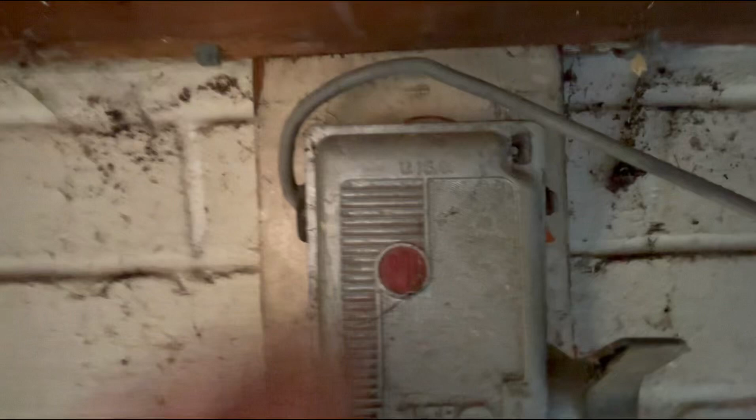Consumer unit then, at the moment they've got this old rusty thing here. This is going to be going, because it's a mess, and that's going for a two-way garage unit, 16 amp for the socket, 6 amp for the lighting. So nice straightforward little install.

Basically what happened was the roof was rotten, so the builders had to rip all the roof off. Well not all, because this is still existing, but more than half I'd say. All the existing electrics have to be taken out for them to do that, and then we're reinstating, but a bit more minimal. They had about 20 sockets in here, all single, screwed to the joists.

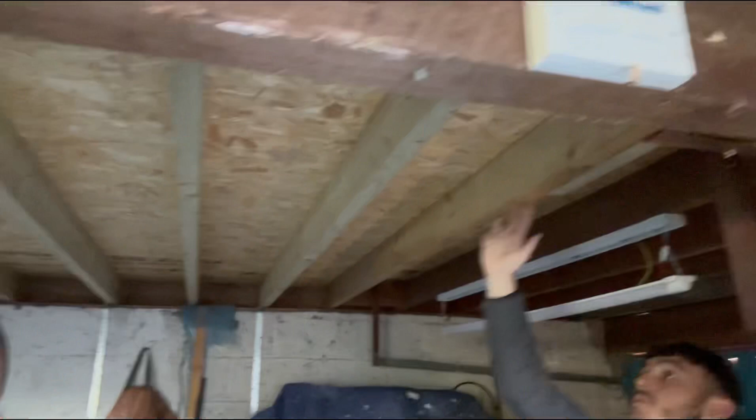They had a 4-gang switch, if I show you, up there, for an array of old fluorescent fittings. They were all over the shop, massive industrial things, 8-foot tubes in them. So yeah, we're just swapping it for these two LED battens, one switch, and a double socket. It will also be feeding the other side of this wall. There's an existing double socket because there's a washing machine in the little room the other side, so we've got to feed that off as well. So it'll be a 16 amp radial feeding the two sockets.

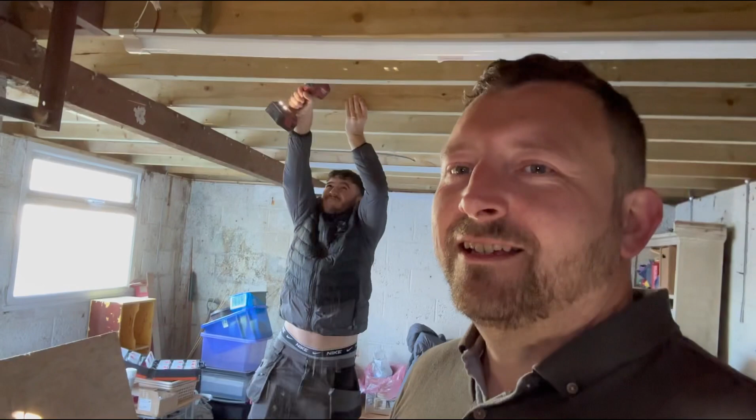So that's us today on Tuesday at the moment. Leighton's cracking on, as you can see. Oh, look at that! I can see his pubes. So yeah, we're gonna crack on with that, and I'll show you as we get on a little bit more.

Why don't penguins like rock music? Rock music? Yeah. No idea. Because they only like soul. You don't get it? Nah. Sole is a type of fish. Yeah. Yeah, it's crap, yeah. Standard penguin jokes. Read my one. Yeah, it's your joke. It's your joke. I know.

Oh. How does a penguin make pancakes? Oh, the big reveal. With his flippers. I'm sure these are getting worse. I know the penguins have been around for a long time, so they're probably running out of jokes, but come on, I'm sure they used to be funnier than this.

Light! Right, we've done it. Just want to explain a few things with this job. This is a job of necessity, so there's a few things that I'd like to change, but I can't. So basically, it's an old dear who lives on her own. This garage is fed off a 2.5 twin and earth. It's in metal tube, back to the house. It's fed off a 16 amp 3036 fuse, no RCD protection.

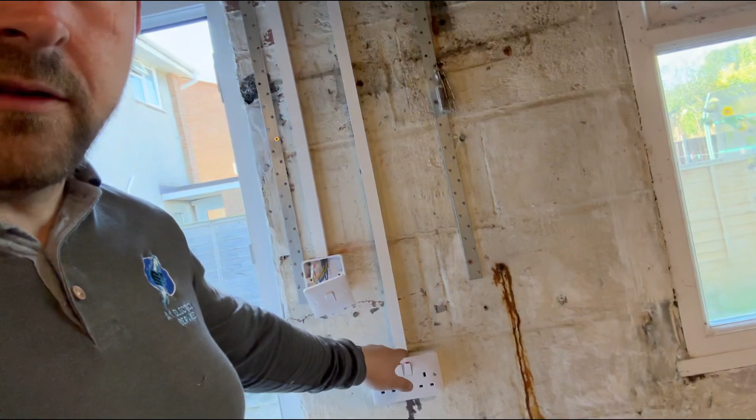We're also fitting Hager accessories. To be honest, I'm quite impressed with the Hager sockets. Nice sockets. The patresses are crap. You're never going to get two cables in one entry hole in the top of there. Don't know why they don't make them bigger. Switches are pretty good as well, and you also got the neutral loop, which I do like. Saves you on a Wago. Have to Wago the earths, because the patresses don't have an earth terminal. I hate it when the patresses don't have earth terminals.

But yeah, that's that. So we're all up and running. Leighton's going to go around testing now while I'm just going to talk crap on the camera. And yeah, that's job one done. To be honest, we absolutely smashed that. Hour and 20 minutes we've done that in. Don't get me wrong, it's not the neatest of jobs. The clipping isn't the best, but it's a garage. It's done, safe. It's going to be tested, RCD protected now, which it wasn't before. You can have a bit more light now off these LED battens as well. These are the Ansell ones, the Tornadoes.

And that's that. So next up on the agenda, I got to pop to a job now, meet the client, full renovation of a house, possible rewire. So I'm going to go there, give her a quick quote. And then we're going to the barn job. So I shall see you at the barn.

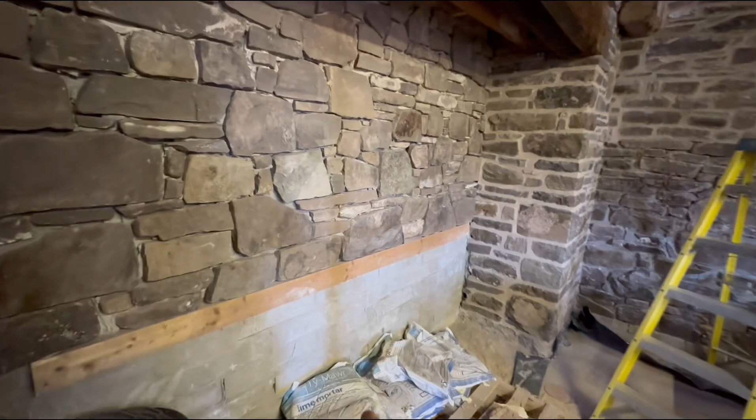So we're at the barn job. This is going to be the extractor fan here. Cooker's going in here, so we've got to get cabling in for that. We've got to try and get all the ceilings done basically. So there's going to be lights in all of these windows. 3 there. 3 here. Don't know how we're going to do it. We've got to get cabling down. There are lights as well. So we've got to get into here. Finished walls. This is the kitchen area. We're not worrying about the sockets at the moment because all that's going to have to come through the floor.

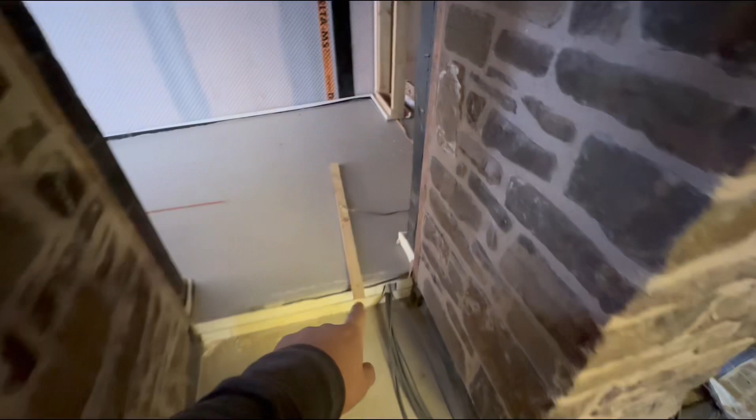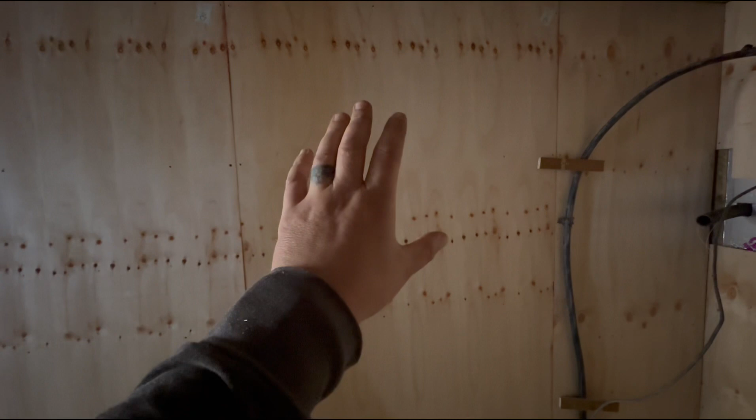We've got feeds through in a ducting through this screed because this is where the consumer unit is going to go. We've got a 25mm SWA coming down as the main incomer. We've got Cat 6 for the interweb. This is going to be the mains. These are various feeds, but the lighting is on a Rako system, I believe. Like a Lutron kind of system, so there's going to be a rack here with dimmer modules. Cat 6s to the keypads, which come back to here, and then all of our lighting is direct fed from here, off a 10 amp MCB off our board, and then it's all switched from here with wireless modules, which have 80-meter range apparently.

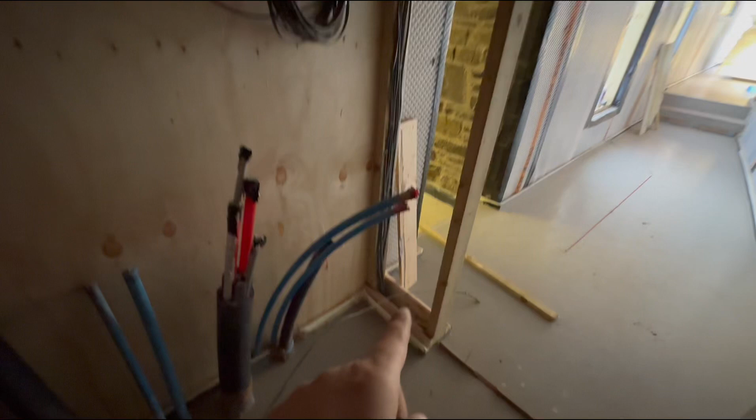This is the link building, we're not doing the link at the moment. All these walls are going to be battened off, ceilings are going to be battened off, and then we can first fix that. This at the minute is just cabling, ready to go back to the mains. So once the ceiling's all battened, we can get these back to the mains.

So we've got cooker feed, hob feed, sockets for the kitchen, sockets for the island. We've got a lighting feed in there, I've got a Cat 6 for data as well, just in case. Which is all going to run through this floor. This is all going to match this floor. So power, we're not too worried about at the moment.

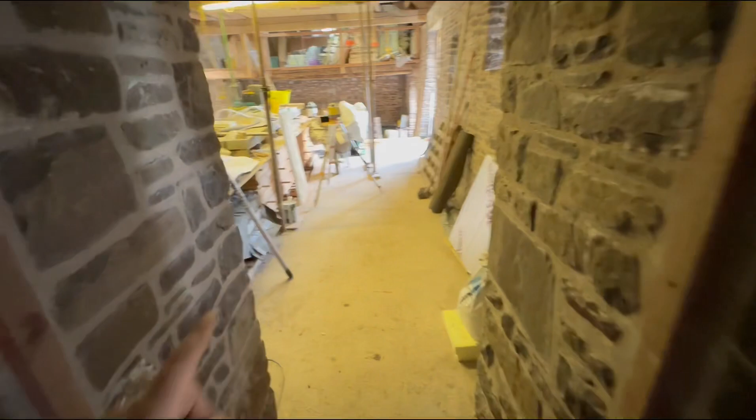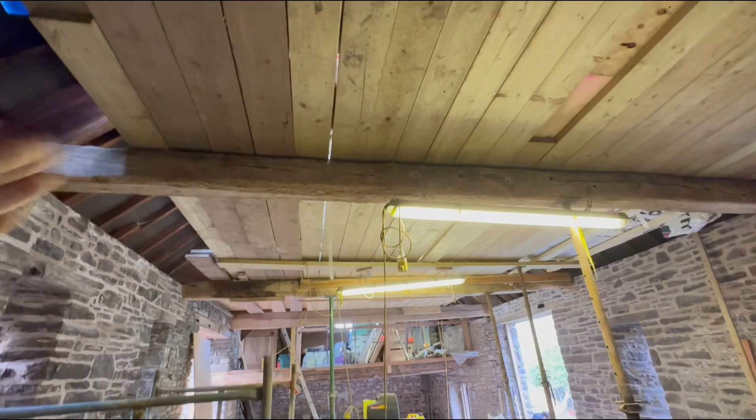But today, we focus on the lighting and the supplies for the Veluxes, because there's some Veluxes up in the roof, which I don't think you can quite see because all these temporary boards are in the way. It's all going to be open, a vaulted ceiling. There is going to be a mezzanine over there where the old one is, but obviously we're not ready for that yet. So yeah, we got to try and get the lighting in. But this is going to be our biggest issue, is these.

So the lighting plan is one in every window. We've got lights on these beams as well. Spotlight, external lighting. I think there's 6 external lights. We do also have lights either side of here and every doorway either side in the floor, uplighters.

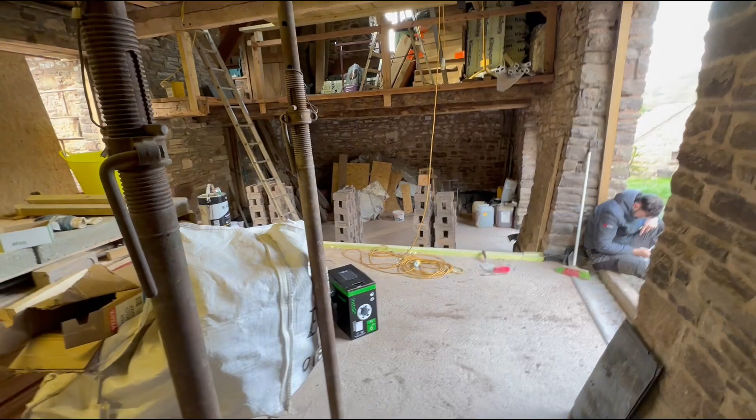And then there's going to be a staircase there, like a spiral staircase. There's uplighters in all the stairs, and then uplighters. There's going to be steps going down into that area as well. So floor washers they're called, not uplighters. So I'll show you our plans.

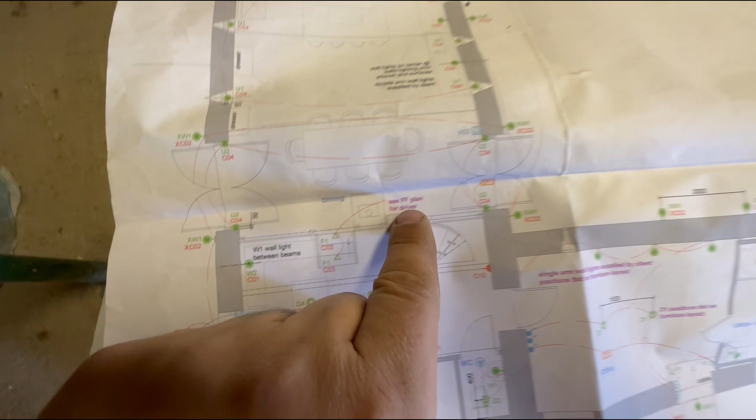These are the plans we've got. These are what we've got to go off. It's quite detailed. It does show us what is switching on with what. Yada yada yada. But like these are the floor washers I'm talking about in the steps. Then you've got the first floor plan for the spiral staircase, which is here.

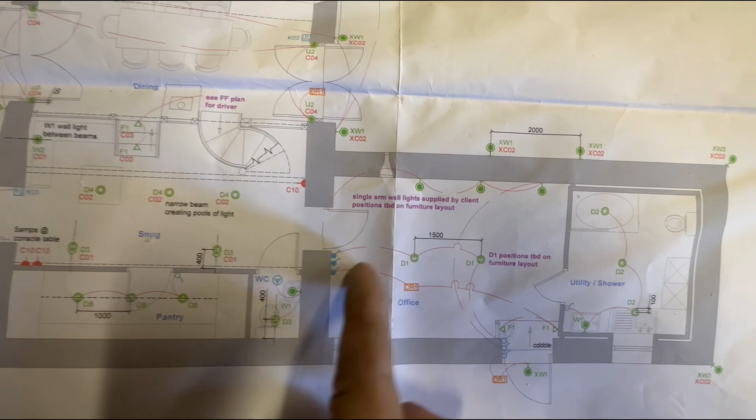Beam lights, beam lights, beam lights. These are all the window lights. They're all uplighters. And then we've got a few wall lights dotted around as well. 5 amp sockets, and yeah, it's a bit of a nightmare. But then this part of the building is just conventional switched, and the upstairs of this building. So that's all that side of the building.

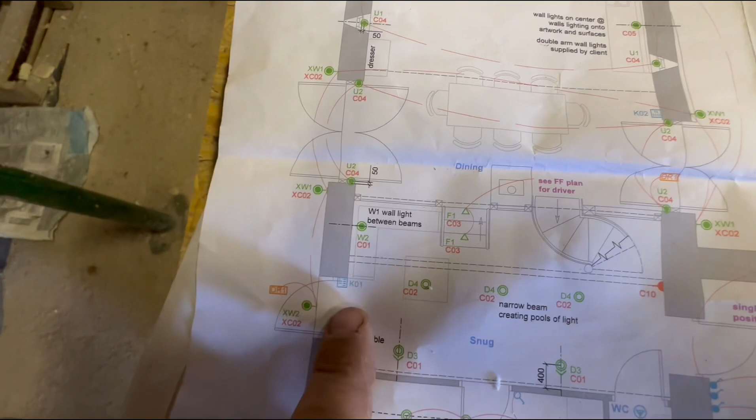There's a door there which we can't go in yet because there's bats living in there. So yeah, that's all conventional, so we don't really have to worry about that. We just get all this. And then these are the positions of the keypads, which all run off Cat 6 cables. But yeah, a finished wall. This is not going to be fun.

So that's what we're doing this afternoon. We're back here tomorrow as well, so I'll get a bit more footage while we're here tomorrow. But yeah, I'm going to have to investigate. I'll do some research tonight because we're going to be hard pressed to keep it in the safe zones. But these are all 12 volt. So do 12 volt have to still be in the safe zones? I do not know. So I'm going to do some research on that tonight because I don't know how we're going to get here otherwise.

We basically got to get into these cells, which is fine, we can drill into here. But then how do we get... Do you know what I mean? Nightmare job, bloody nightmare job. But yeah, that's what we're doing this afternoon.

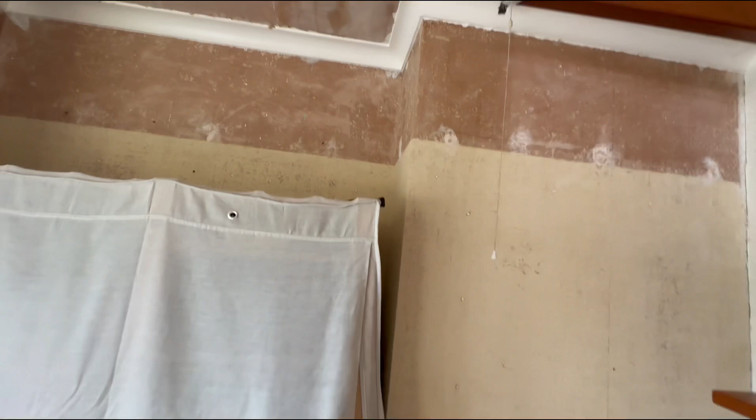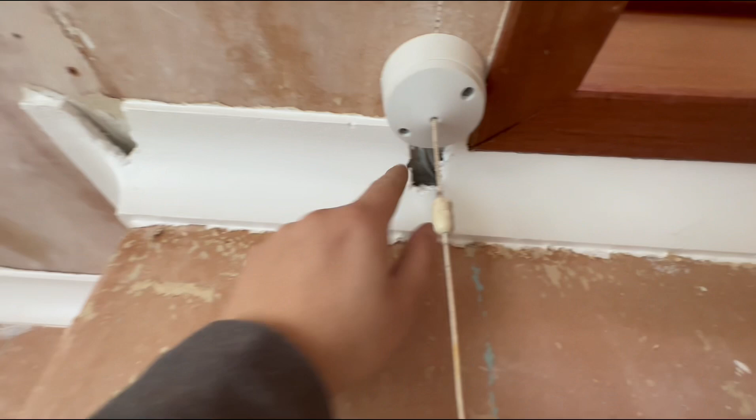So the first job consists of moving a pull cord from point A to point B. There's going to be some wardrobes built in this area, so that was in the way. Felt really lucky because the cables run through the coving. So all I've done is cut a piece of the coving out, dragged it across, popped it there, kept the coving as well, so we can pop that in, bit of filler, fill the old hole, and job's a good one. So that is our first job on a Thursday.

Well, I say that, we've got the bits to do here. Changing that switch now to either a dimmer or a switch, depending on how deep the box is. Changing that, and there's another socket here somewhere. There. So 3 double sockets to change to brushed, customer supplied. So that's that. That's our first job.

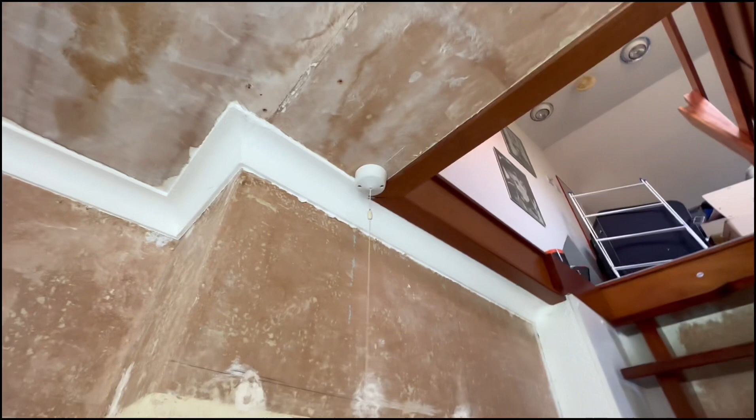So that's that moved, filled the holes. It's not amazing, not the best filler, but it's better than holes. One problem we got though, no earth in the switch. So unfortunately I'm going to have to tell the customer that they can't have these fittings. Sockets should be okay, I haven't checked them, but there's generally earth in sockets, isn't there? But yeah, there's no CPC in there. So we can't do that for her, unfortunately. So we're going to crack on with these now.

So that's the cooker done. It was just a swap for swap. I couldn't get any footage because the customer didn't want me to film, so I've got to respect the privacy. It was just a freestanding cooker. Disconnect the old one, connect the new one. Took me 20 minutes, quick earth continuity test, and away we go. So we're going to the next job now, which is trying to figure out why the electric's going off. Like I said, I reckon it's a loose connection. So we shall have a gander.

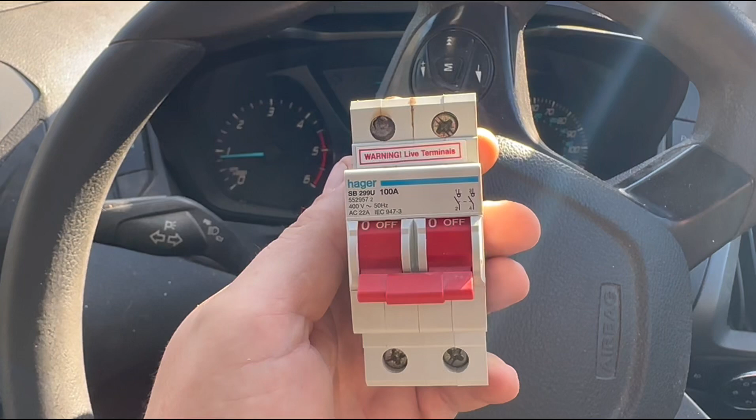So as suspected, it was a loose connection, but look at that, it actually melted. I couldn't get it out. And it's melted the terminals. It even started to melt through the side. So this is why loose connections cause fires. So for apprentices out there, make sure your connections are tight. And if you're fitting a consumer unit, use a torque driver to the manufacturer settings, because then you're covering your own arse. If this happens then, and you followed the manufacturer's instructions, it's on them, it's not on you.

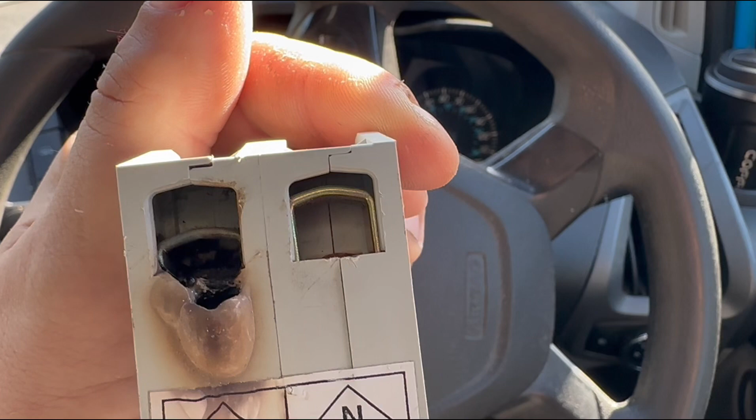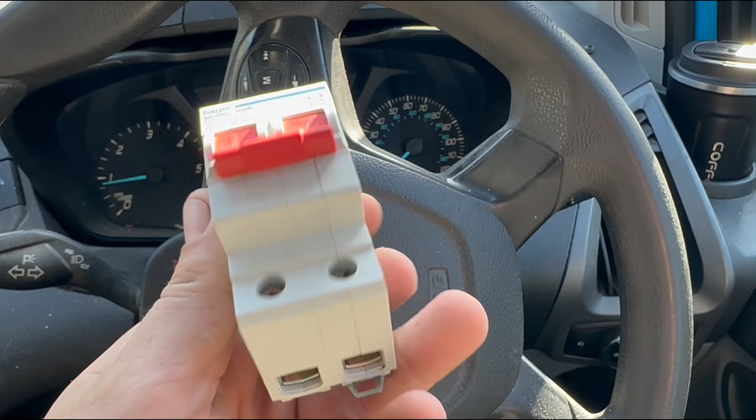But you know, if this got left and left and left, potential fire there, or the fuse board could have melted. So it's a good job I came when I did. I didn't film the actual job because the customer wasn't keen on that, but you know, the bottom's fine. That was the culprit. So their electricity was going off and on willy-nilly. Seemed to be when they were having a shower. It's probably, like I said earlier, because of the load. But yeah, nice little find there.

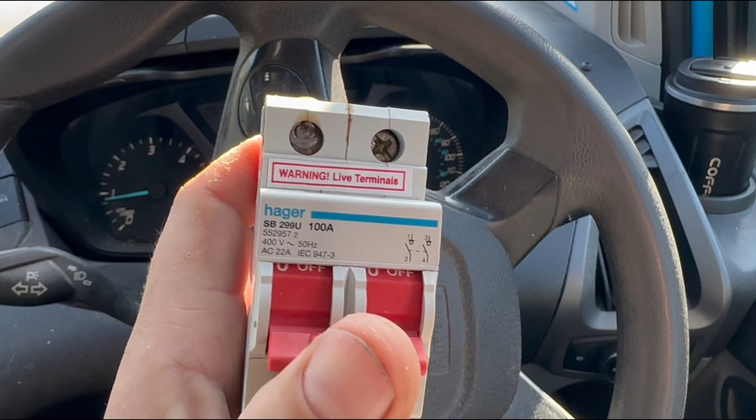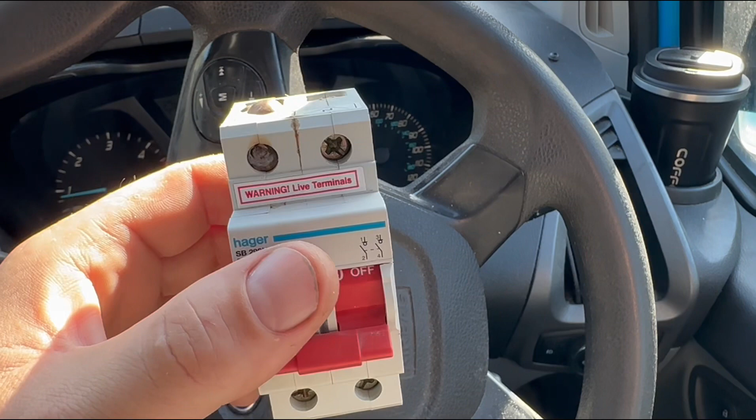And I had one of these on the van. I had a Hager 100 amp main switch. The local wholesaler stocks Hager, so I've got a few spares, because that's all I used to fit before I fitted Verso. So I do have a fair few spare Hager main switches, RCDs, RCBOs and MCBs. But yeah, so quick little job and it's sorted. And that's me done for the day. Thursday, nice easy day.

Leighton's in college. Done 3 little jobs, I think, or 4. I can't remember how many I've done. Oh yeah, that's me done now till tomorrow. The sun is shining. It's a great day out there, and I got to pick the kids up from school. I'm gonna have a nice afternoon.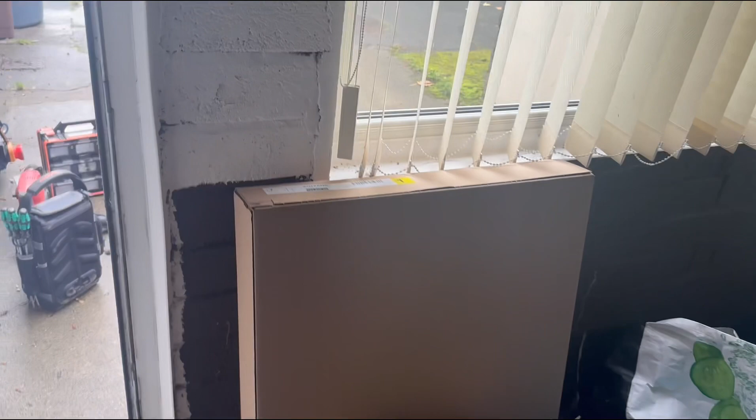Today we are doing a Hypervolt again. So we've got all the kit, just unloaded the van. Hypervolt is going on this wall here. Nice easy run in all fairness. Coming through the wall, round about here somewhere. Cleat straight up. Around.

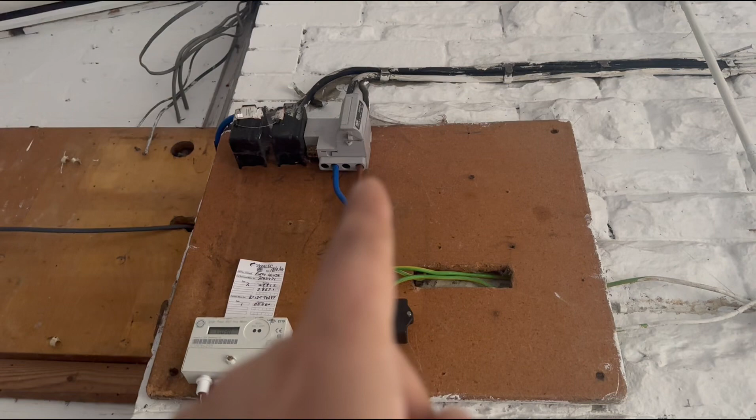We've got the mains up there then. So that's where I'm going to CT it on the tails. And then we go straight through this wall to the mains there. Well, that's pretty easy, nice easy run. I have picked up for the consumer unit a Type A RCD because they are AC in the board. It's a BG Screwfix special. So yeah, that's our plan.

Leighton's back, college yesterday. He's failing miserably. Oh, yeah. So yeah, that's the plan. I will keep you updated as we progress.

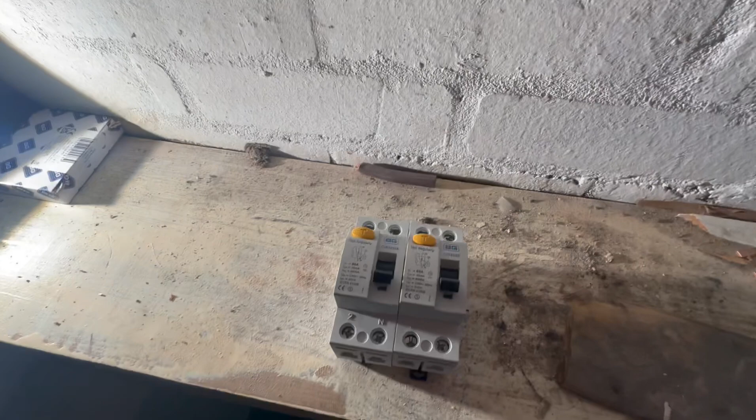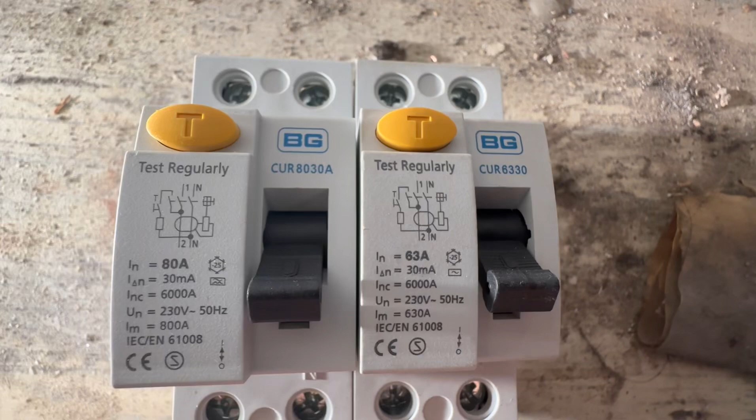Apologies for the poor lighting, I'm just working off a light in this cupboard. I've taken the RCD out now, but I just wanted to show this for apprentices and whatnot if they didn't know how to tell the difference. So this is the original RCD here. This is the Type AC. As you can see, it's got the AC waveform. And then a Type A, see, it has those little boobies underneath it.

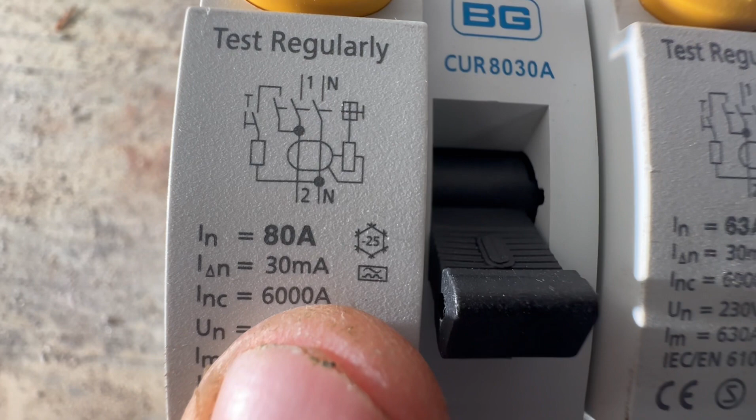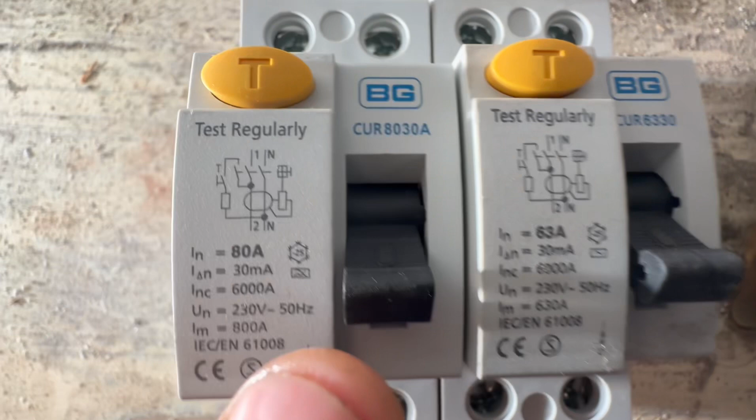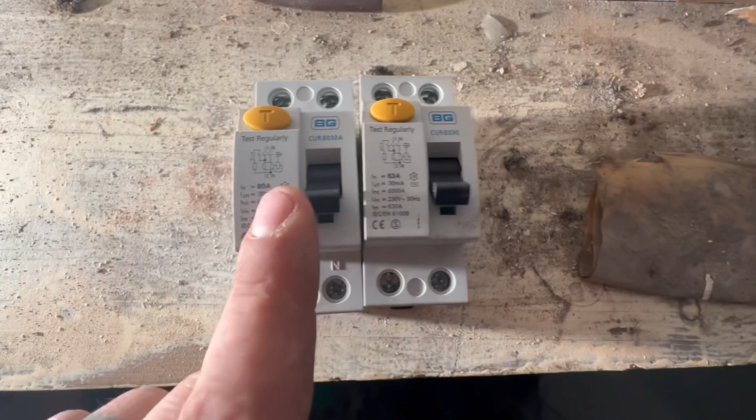Yeah, look at my nail. Those little boobies underneath the waveform. So that means it's a Type A RCD, whereas that one doesn't have the boobies, so that's an AC. So that is how you tell the difference if you're on a quick look in a consumer unit. And even the part number has an A on the end of this one. Well, it's a completely different part number actually, but that's how you would tell with different brands, etc. So that's coming out and that's going in.

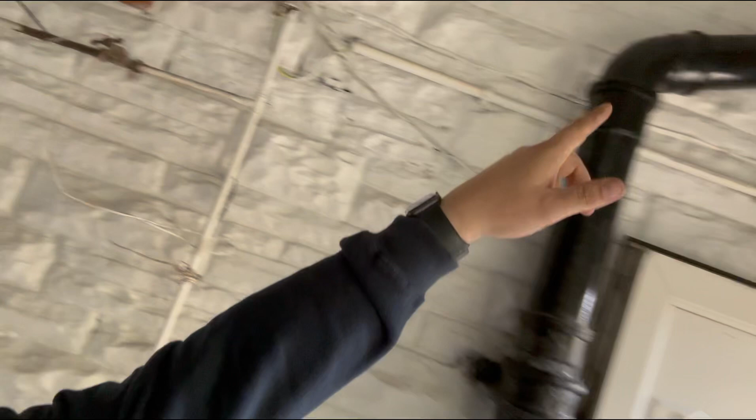Well, ladies and gentlemen, we are done. If I just quickly show you the charge point, etc. There's a charger there, that's where the lady wanted it. We have come through with a 6mm SWA and a Cat 5 up and around. Oh, let me turn this camera around. We've come round there. My Cat 5 has then come through here into this Wiska box, CT clamp.

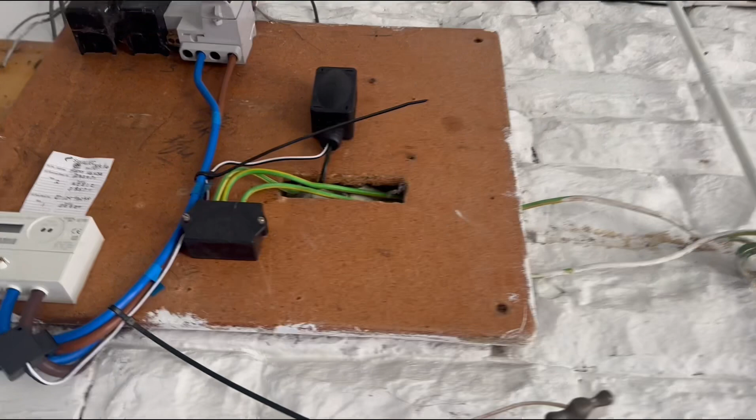Oh, I haven't clamped it on. Silly Sally. Let's get that clamped on. Is that on? No. You bugger. I nearly swore then. There we go. CT clamp on there. Always have the arrow facing the load, so that's that.

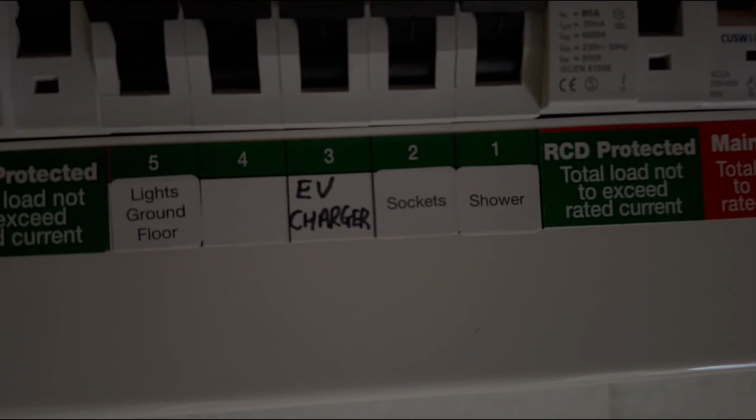And then the SWA runs around, goes through the mains tails, into this dark hole around there, into the consumer unit. Changed the RCD and then labelled EV charger. So that's that. Leighton's just going to pack up now. I'm going to go grab my iPad, do the cert, and we are done.

Whew, nice job on a Friday. 12:10, and that's our only job for the day. So we're going to have a nice, relaxing afternoon. So there we are, another week done. Just going to do a bit of paperwork now, and that's that.